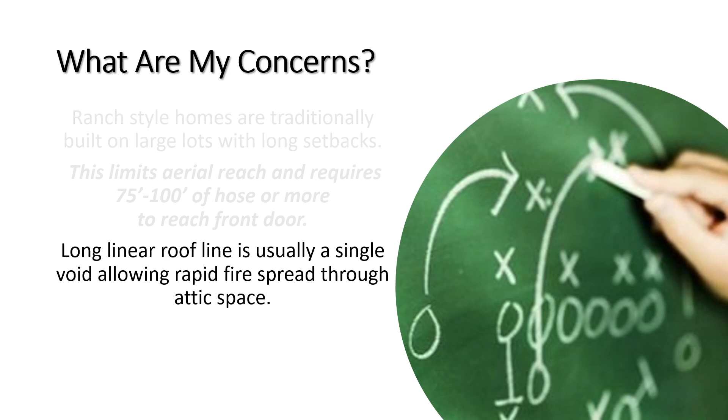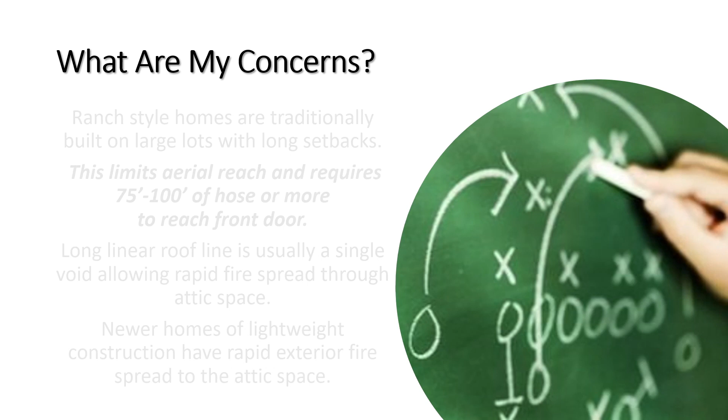Tactics. Where's the fire now? Where's the fire going? Can I get ahead of the fire? The tactics are similar to the small single-family dwelling. We use slightly larger fire flows based on the size of the structure. Depending on the age of the structure, they may have no exterior basement access, a partial basement access, maybe a walkout basement, or no basement at all. Maybe there's just a crawl space. Basement fires need to be addressed through the lowest entrance if at all possible.

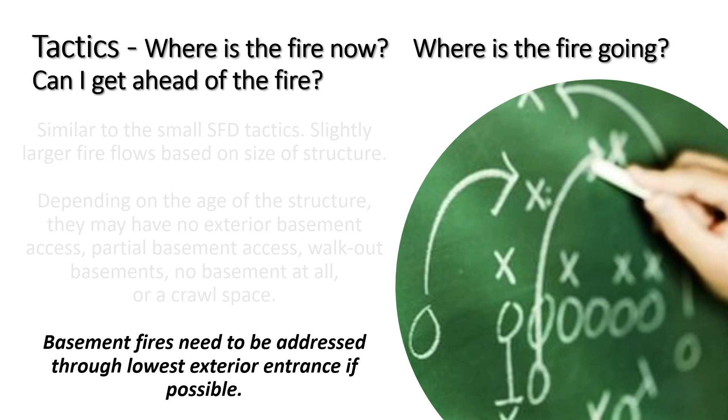The Colonial. The classic colonial style detached house floor plan has the kitchen and the family room on the first floor, and the bedrooms are usually on the second floor. As families create in-law suites, all manner of sleeping arrangements can be found in this home design.

Special attention should be given to alterations including additions, dormers, bump outs, and chimneys. Home designs may vary with additional structures, such as decks, patios, and enclosures being very popular and only limited by budget and permitting.

The initial on-scene report. Paramedic engine 740 is on the scene, on the Alpha side of 146 West High Street. It's a three-story colonial with nothing showing from sides Alpha and Delta. All units use caution. There is a swimming pool on side Charlie. I'll be doing my 360 and I'll provide an update.

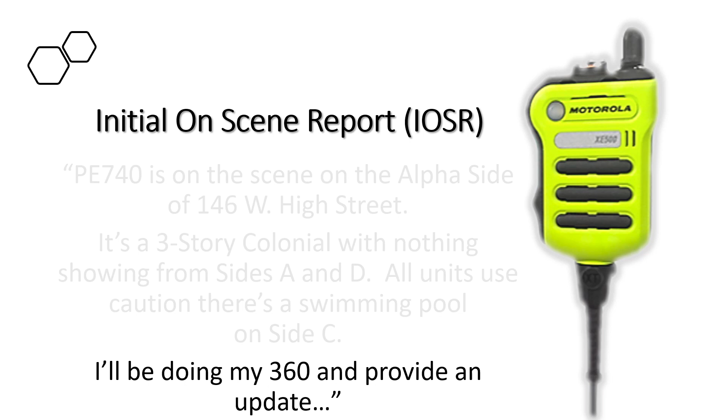What are my concerns? Traditional colonials have a large central chimney, or two large chimneys on opposite sides of the home. These are collapse hazards under fire conditions.

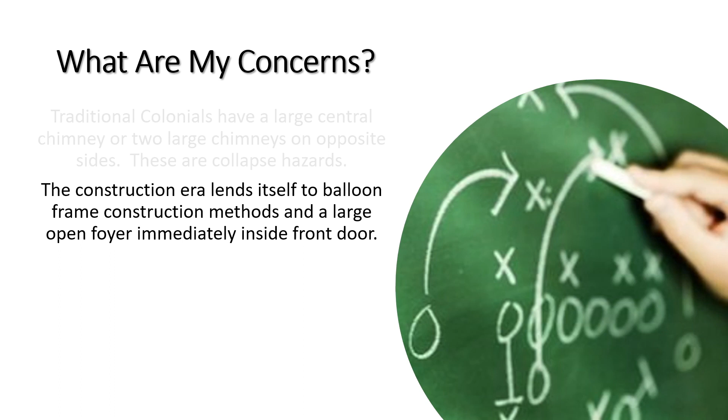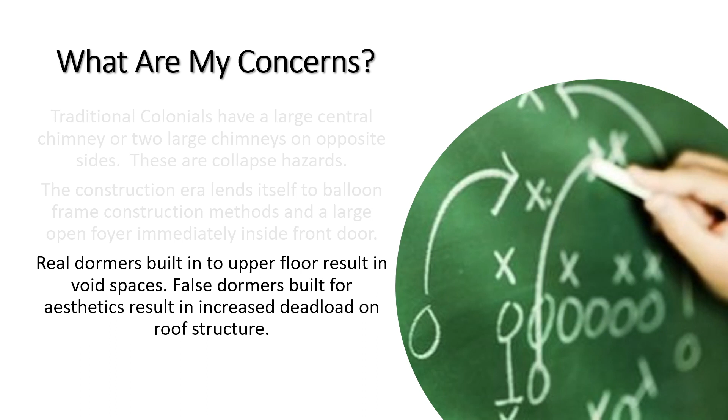The construction era lends itself to balloon frame construction methods and a large open foyer immediately inside the front door. Real dormers built into the upper floor result in void spaces, while false dormers built for aesthetics result in an increased dead load on the roof structure.

Colonials are often built on large plots of land, resulting in the same aerial access issues and hose line requirements of a rancher.

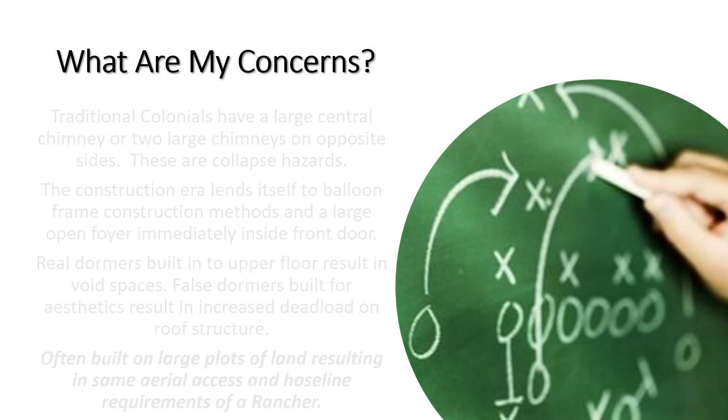Tactics. Where is the fire now? Where is the fire going? Can I get ahead of the fire? The large open foyer can result in rapid fire spread to the upper floor. Longer lines may be necessary to navigate the larger floor plan and a large front yard setback.

Balloon frame construction methods necessitate checking for vertical extension to multiple floors, the attic, and the basement. For fire in the walls, it might be quicker to pull the exterior siding than to pull heavy plaster and lath on multiple floors.

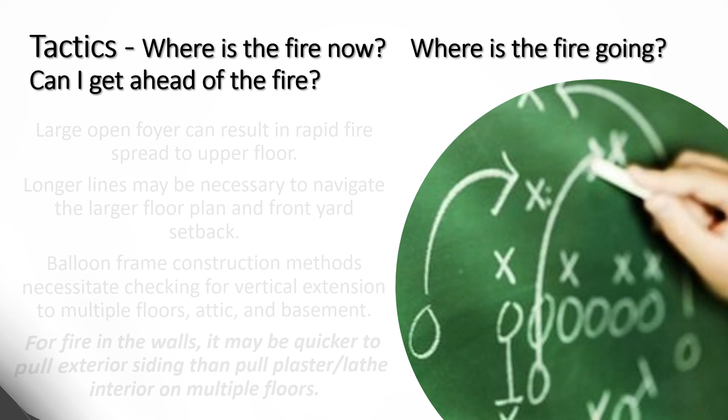The split foyer. These detached homes are a typical two-story with front entry between both floors. That means the giveaway for this design type is that inside the front door is a set of steps going up and another set going down.

Home designs may vary, with additional structures such as decks, patios, and enclosures being very popular and only limited by budget and permitting.

Do we count a foyer? The foyer level itself has no name, and it exists only as an entry to the stairs leading up and down into the home.

What's in a name? These homes may have 3 to 4 different levels and could possibly have sub-basements and garages. The naming of these levels follows common practices according to the IRP.

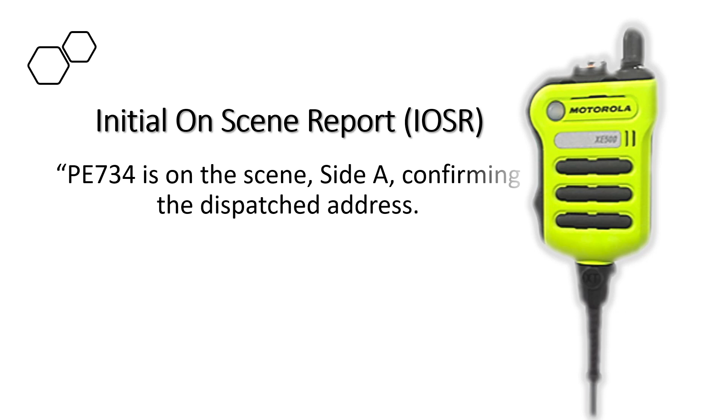Here's your initial on-scene report. Paramedic engine 734 is on the scene, side Alpha, confirming the dispatched address. It's a 2-story split foyer, single-family dwelling. I have nothing evident from Alpha, Bravo, and Delta. I'll be out investigating.

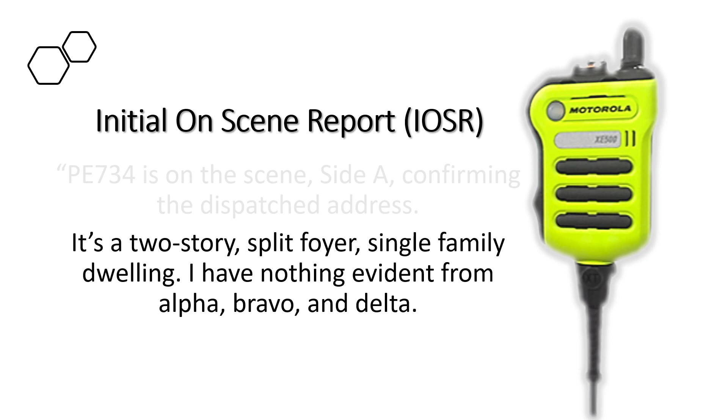What are my concerns? The floor configuration can lead to confusion in names and locations. The lower level is often mixed use and can include a den, a living space, bedroom, garage, a laundry area, and/or something unfinished. With these various uses come various fire loads.

The terrain and construction on the split foyer can make the windows of upper stories awkward for ladders.

Tactics. Where is the fire now? Where is the fire going? Can I get ahead of the fire? Remember to include floor names with the SUR or the IOSR.

It's a 2-story split foyer single-family dwelling. I'm going to call the floors the basement and the first floor, or the first and second floors. Place initial lines to protect the upstairs searches. Remember to always coordinate ventilation of lower levels to ensure flow paths are limited.

The split level. The front door is on the main level, which has the kitchen and family room. The bedrooms will be on the top level, but depending on the owner, the lower level may have some converted bedrooms also.

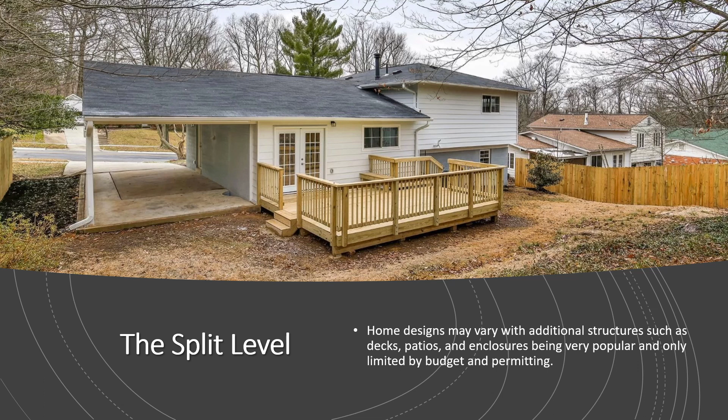What's the split? The entrance opens to Division 1. Once inside, a few steps up and down divide the upper and lower levels.

Initial on-scene report. Paramedic engine 702 is on the scene, side Alpha of a split level Type 5 single-family dwelling. I have nothing evident. I'll be out investigating.

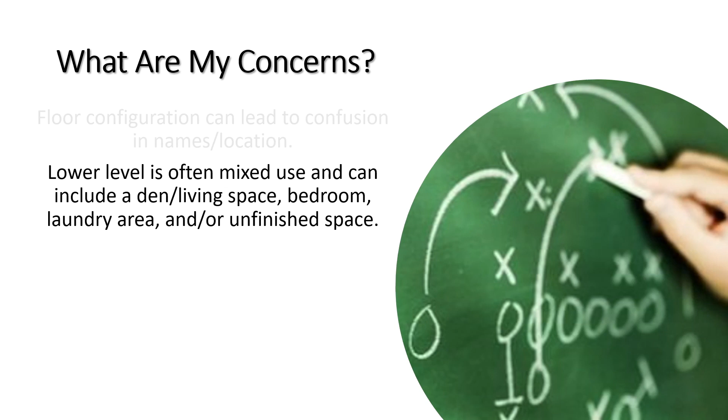What are my concerns? The floor configuration can lead to confusion in names and location of the split level home. The lower level is often mixed use and can include a den, a living space, a bedroom, a laundry area, and/or unfinished space. With these various uses come various fire loads. Remember, terrain and construction features can make the windows of the upper stories awkward for ladders.

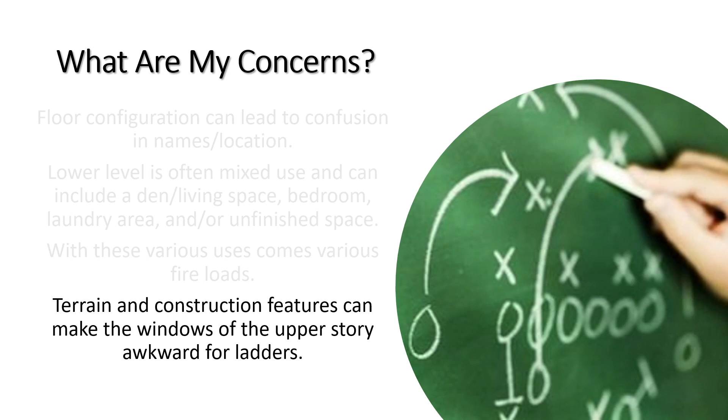Tactics. Where is the fire now? Where is the fire going? Can I get ahead of the fire? Remember to include floor names with your SUR or IOSR. For example, this is a split level Type 5 single family dwelling. I'm going to call the floors the basement and first floor, or first and second floors.

Place initial lines to protect the upstairs searches. And always remember, coordinate ventilation of lower levels to ensure flow paths are limited.

The Cape Cod. The Cape Cod style house is a low, broad, detached single-story frame building with a moderately steep pitched gabled roof, a large central chimney, and very little ornamentation. The first floor is much like a rancher, with the kitchen, a living room, and bedroom usually found.

If present, the second floor is typically divided into additional bedrooms. These homes are frequently desired as remodels into more modern designs or razed completely, giving way to the larger designs favored today and explained in some of the coming graphics.

Initial on-scene report. Paramedic engine 706 on the scene confirming 189 West Main Street. It's a 1.5-story Type 3 Cape Cod single family with nothing showing from sides Alpha and Delta. I'll be out checking and we'll get back to you with a SUR.

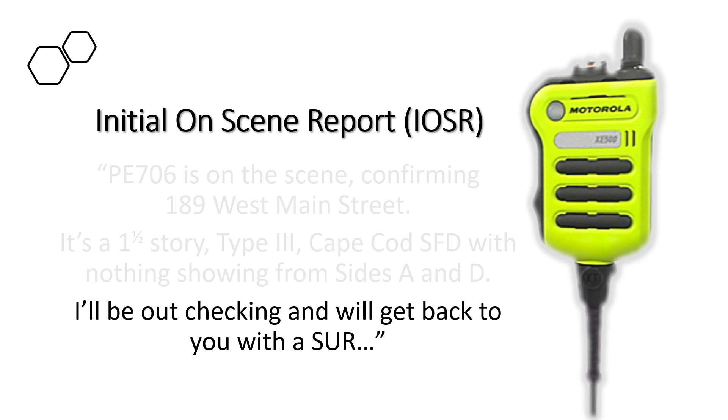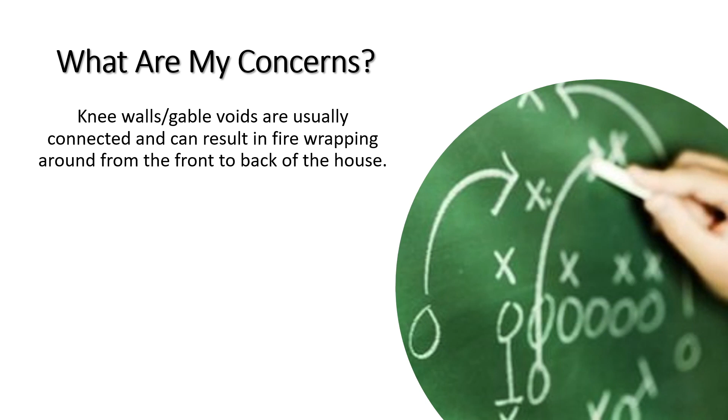What are my concerns? The knee walls and gable voids are usually connected if present in this cape, and they can result in fire wrapping around from the front to the back of the house. There's a significant amount of overhaul needed for older capes, with tongue and groove boards and plaster and lath wall coverings, and they may have those ornate metal or tin ceiling coverings.

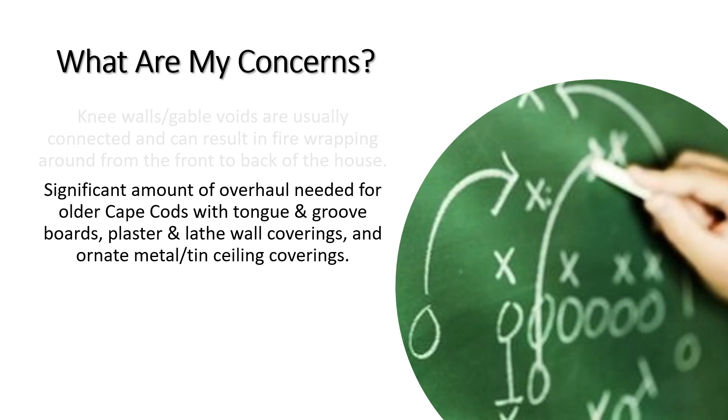Fires in the voids result in high heat and smoky fires, making locating the seat very difficult. The steep pitch and materials on the roof make roof work challenging and requires heavy amount of truck work.

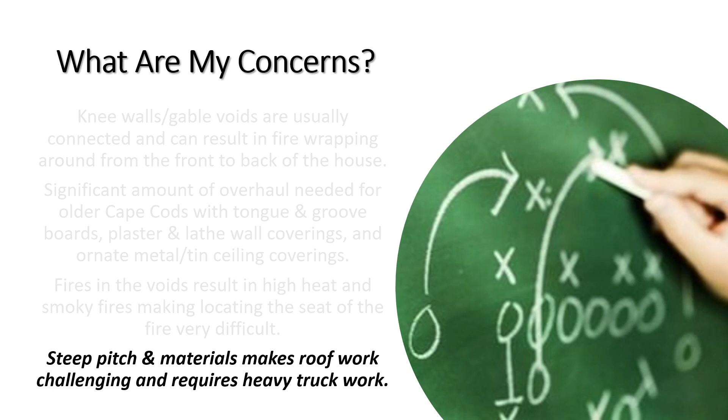Tactics. Where's the fire now? Where's the fire going? Can I get ahead of the fire? Ensure a line is in place before opening any walls or voids. Multiple lines may be necessary to handle fire running through the front and rear knee walls and overhead in the gable void.

Use power tools to help ease the workload on opening tongue and groove floors and plaster and lath walls. Positive pressure ventilation may be needed to clear smoke and cool crews operating upstairs, but ensure a line and a crew remains in place to handle any hidden fire.

The McMansion, or large single-family dwelling. The 3,000 to 5,000 square foot home built on very small lots.

This detached design is frequently placed in standing neighborhoods as a complete teardown of a previously built home. A giveaway is the odd look or size of the home in comparison to the rest of the homes in the neighborhood. This home is usually larger and taller with designs and structures occupying most of the available lot space. Vast open stairs and second-story ceilings are common in this design type.

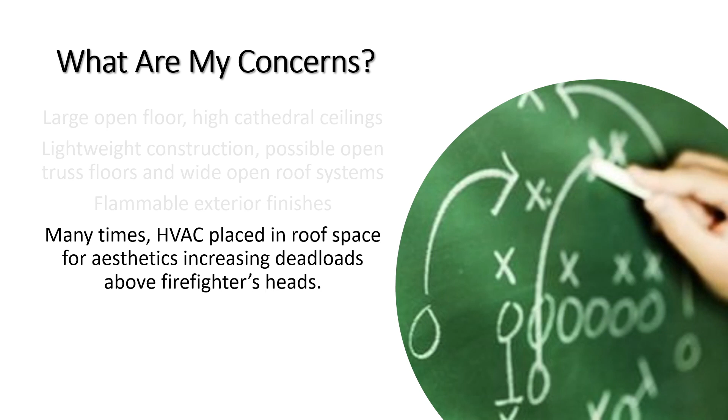As a matter of fact, aesthetics in general outrank function and safety in the design phase of these type of homes.

Tactics. Where's the fire now? Where's the fire going? Can I get ahead of the fire? Depending on the floor space, longer lines and larger diameter lines might be necessary for increased fire flow and further reach. Thermal imaging cameras are critical on structures with high ceilings to evaluate what is going on above the crews operating.

Many McMansions have multiple stairwells, and some have a catwalk through a grand foyer, easily causing disorientation or a fall risk. A line must be placed on an exterior fire to control fire and rapid extension.

The mansion: greater than 5,000 square foot homes on estate type properties.

Cost and imagination are the only limits in this home design. This leads to many owners creating completely unique homes, unlike any other in their community. These can be vast homes on estate-type lots, which create significant issues with water supply, requiring much coordination and possible tanker use.

The initial on-scene report: Paramedic Engine 710 is on the scene, side Alpha, the dispatched address. This is a very large two-story single family, approximately 150 by 75. Units use caution, there's a covered pool on side Charlie. Nothing evident from sides Alpha, Bravo, and Charlie. I'll be out investigating.

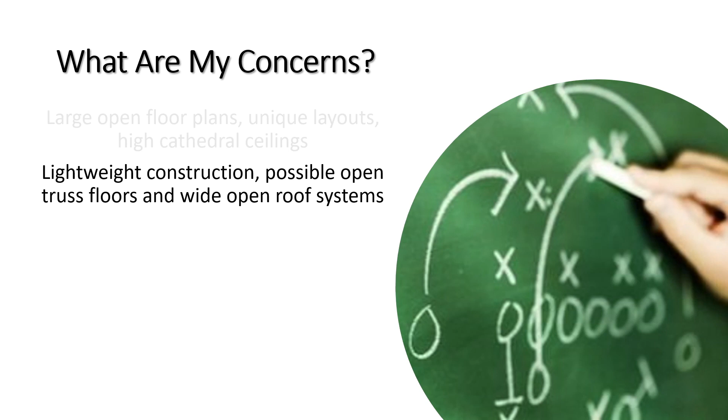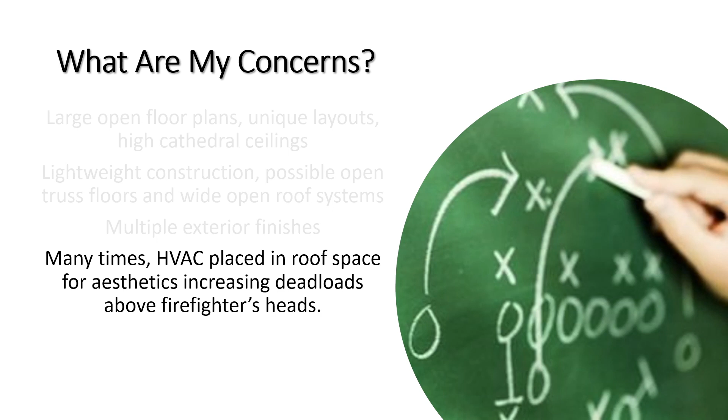What are my concerns? Large open floor plans and unique layouts, high cathedral ceilings, lightweight construction techniques, possible open truss floors, and a wide open roof system above it all. There are multiple exterior finishes very common in this design. Many times the HVAC is placed in the roof space for aesthetics, increasing the dead load above firefighters' heads. Aesthetics in general outrank function and safety in the design phase of these very large homes.

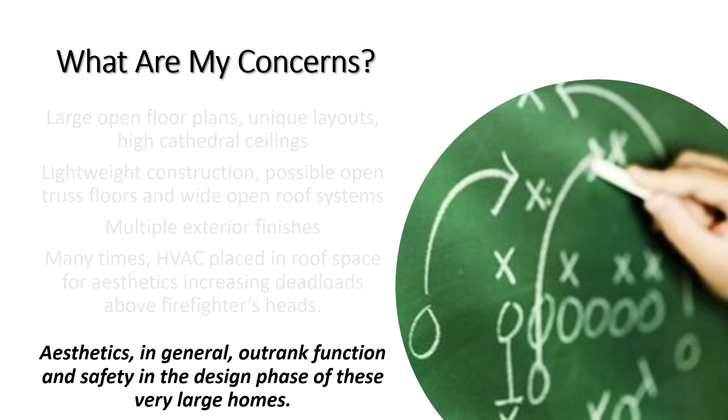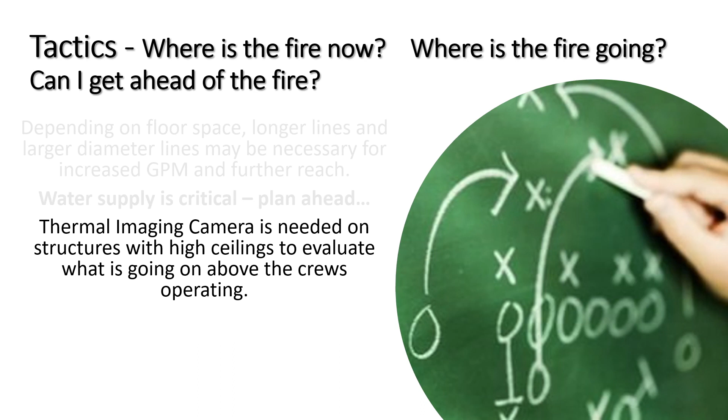Tactics: where is the fire now? Where is the fire going? And can I get ahead of the fire? Depending on floor space, longer lines and larger diameter lines might be necessary for increased fire flow and further reach. Water supply is critical, so plan ahead. The thermal imaging camera is needed on structures with high ceilings to evaluate what is going on above the crews operating below. A line must be placed on the exterior fire to control fire and rapid extension. Special services should consider the use of a tagline for search orientation.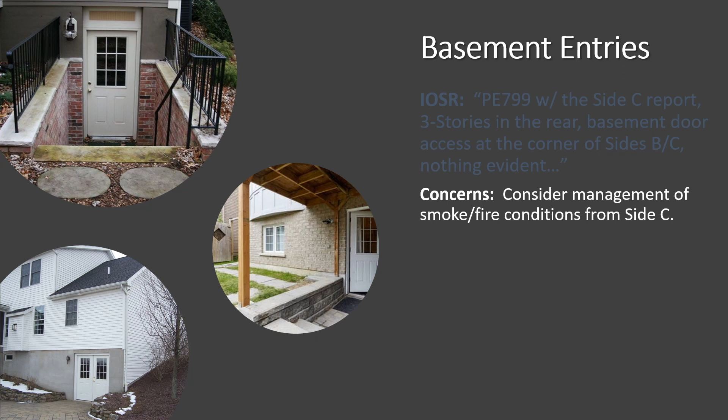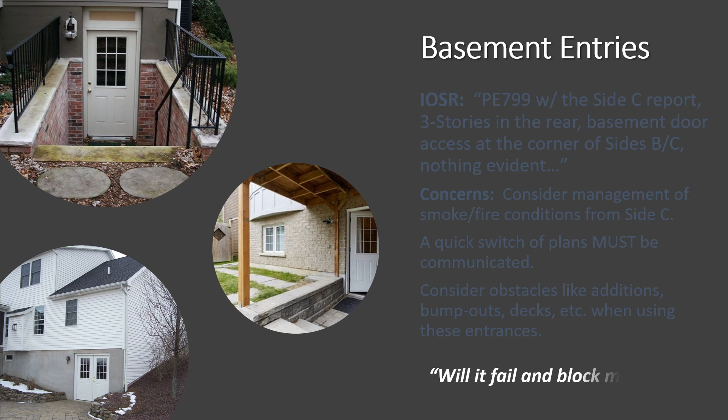Basement entries. Paramedic Engine 799 with the side Charlie, 3 stories in the rear, basement door access at the corner of Bravo and Charlie. Nothing evident. What are my concerns? Consider management of smoke and fire conditions from the Charlie side. A quick switch of plans must be communicated. Consider obstacles like additions, bump outs, and overhead decks, etc.

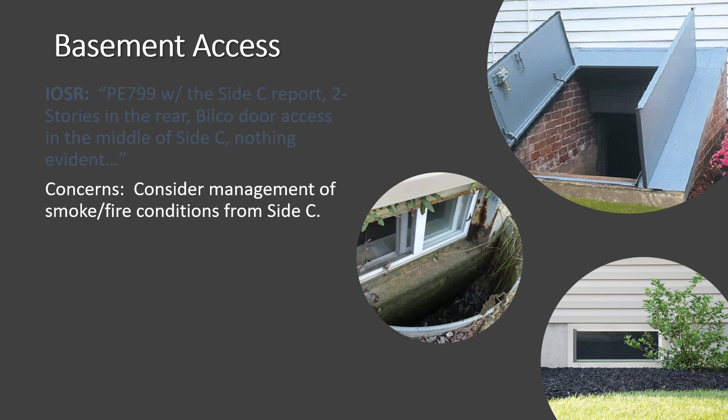Basement access can be different than an entry. Paramedic Engine 799 with the side Charlie, 2 stories in the rear. I have Bilco door access in the middle of side Charlie with nothing evident. What are my concerns? Consider management of smoke or fire conditions from the Charlie side if you're able. A quick switch of plans must be communicated. Except for the Bilco, these are access only and not meant for fire rescue entry. Bilco doors must be positively secured before entry. Remember, these lock.

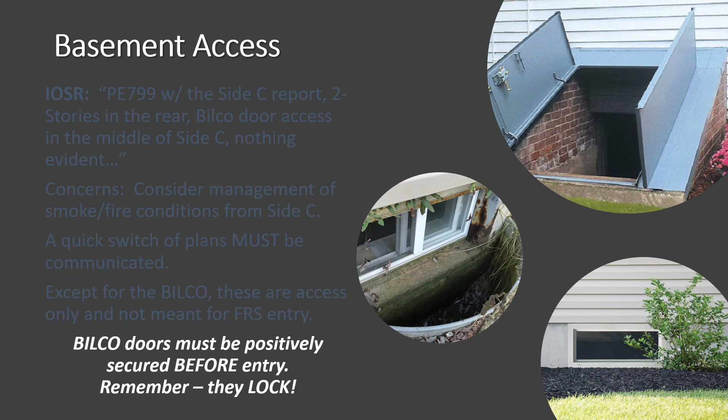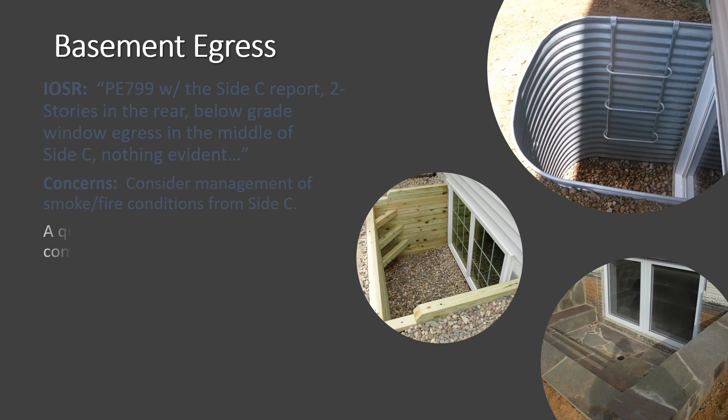Basement egress. Paramedic Engine 799 with the side Charlie, 2 stories in the rear, below grade window egress in the middle of side Charlie with nothing evident. What are my concerns? Consider management of smoke and fire conditions from the Charlie side. A quick switch of plans must be communicated. They're only intended for emergency egress and not two-way entry and egress. The below grade egress usually indicates a sleeping area.

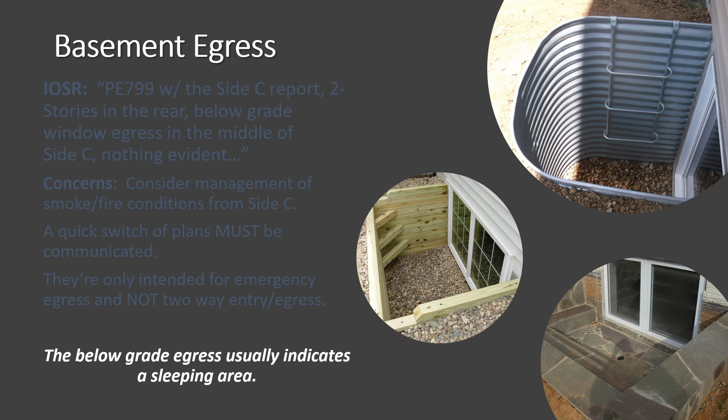The single family attached. This is an attached structure with its own address intended for one family. These dwelling units share party walls and have small lots in the front and back of the home. Commonly, these are referred to as the duplex, the townhouse, the hybrid townhouse, and the row house.

The duplex. A duplex is a single home that is divided into two equal, separate living spaces. Most common is a house with two doors, side by side, that enter into different living spaces in one building. There is frequently a small yard in the front and back of this type of attached house.

This attached home will have a firewall or a party wall of at least 2 inches of sheetrock separating each unit. Think of a 2-unit townhouse, a left and a right side, with separate utilities. The floor plan is mirrored on each side. What does this mean? This means that the interior is exactly opposite the other, as if looking in a mirror.

The initial on-scene report. Paramedic engine 705 on the scene of side alpha of the dispatched address. It's a 2-story brick type 3 duplex. I have nothing evident from side alpha. I'll be out investigating.

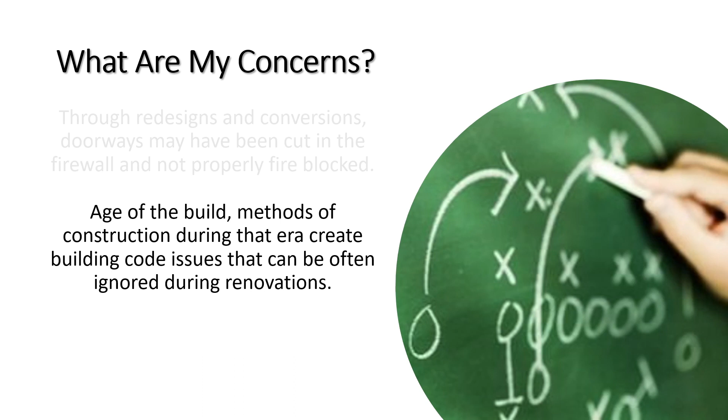What are my concerns? Through redesigns and conversions, doorways may have been cut in the firewall and not properly fire blocked. The age of the build, methods of construction during that era create building code issues that can often be ignored or overlooked during renovations. Depending on the area, consider multiple unconventional apartments. There's a hint. Are there interior keyed doors?

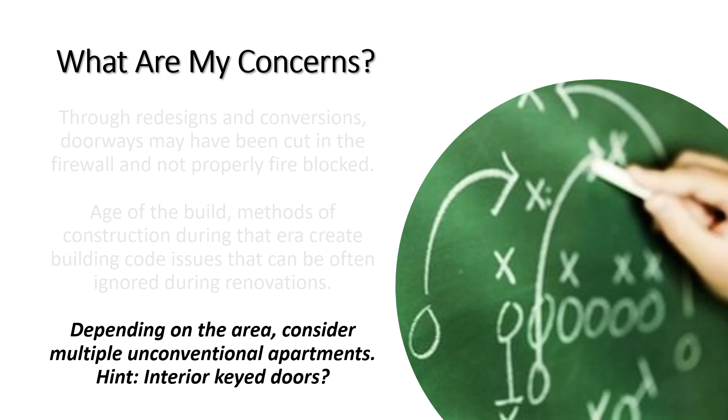Tactics. Where's the fire now? Where's the fire going? Can I get ahead of the fire? Getting a line on the fire and managing the exposure is critical. The duplex has a common roof and firewall system, and crews must confirm the firewall is intact and there is no presence of smoke or fire in the exposure. The thermal imaging camera is a great tool to evaluate what is going on above the crews operating and in the exposure building. Coordinate ventilation to ensure flow paths are limited.

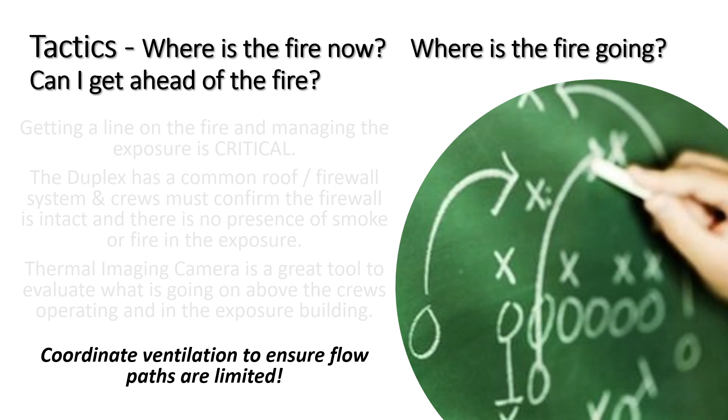The townhouse. The townhouse is defined as a single family attached with at least 2 floors that share a wall with another house. Unlike a duplex or a fourplex, however, each townhouse is individually owned and of 2 basic types: end of the row or middle of the row.

The end of the row townhouse. Exposures on the end of the row are just a few feet away. Fire spread is a real concern and even hastened by the slightest wind. Windows on the side Bravo or Delta pose problems for control of fire spread. Many have the grand peaks and dormers which hide large void spaces. Additions, decorative railings, bump outs, decks, etc. must be considered for potential failure, like this side Charlie image.

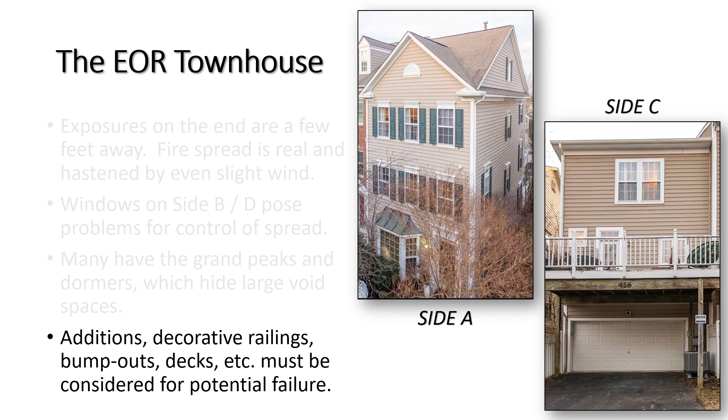The open stairs. Running bottom to top, these open staircases are a quick way for smoke and fire to travel throughout the townhouse. Consider this a chimney, enhancing the flow path.

The initial on-scene report. Paramedic engine 723 is on the scene of side Alpha, confirming the dispatched address. It's a 3-story lightweight construction, middle of the row. I have nothing evident from side Alpha. I'll be out investigating.

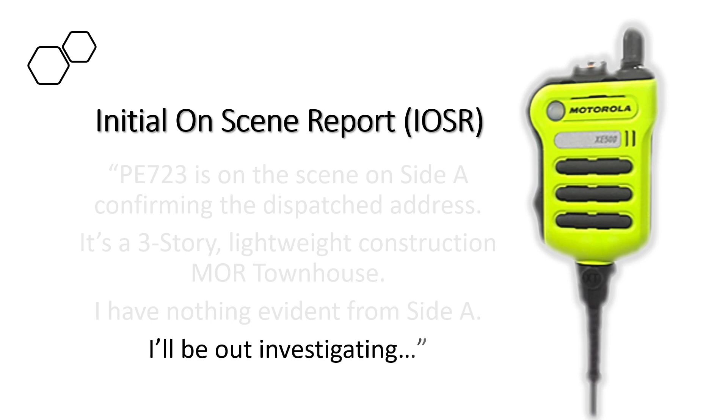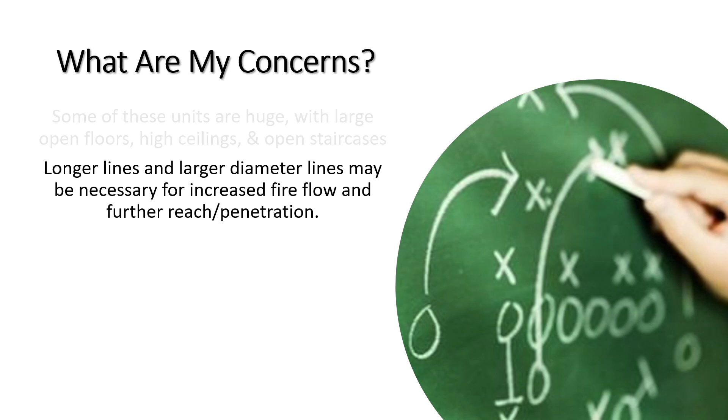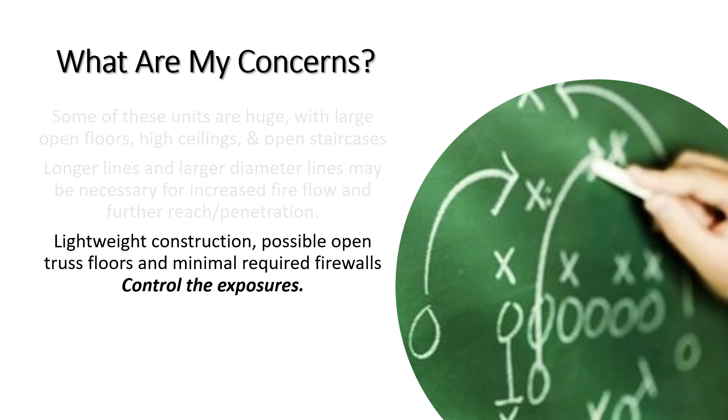What are my concerns? Some of these units are really huge, with large open floors, high ceilings, and open staircases that run top to bottom. Depending on the size and position in the row, longer lines and larger diameter lines might be necessary for increased fire flow and further reach in penetration. Remember, these are lightweight construction and have possible open truss floors with minimal required firewalls. This means we must control the exposures.

Some have flammable exterior finishes. Exterior finishes and facades do become unstable in fire conditions. Ask yourself, am I too close? Remember, facades equal collapse.

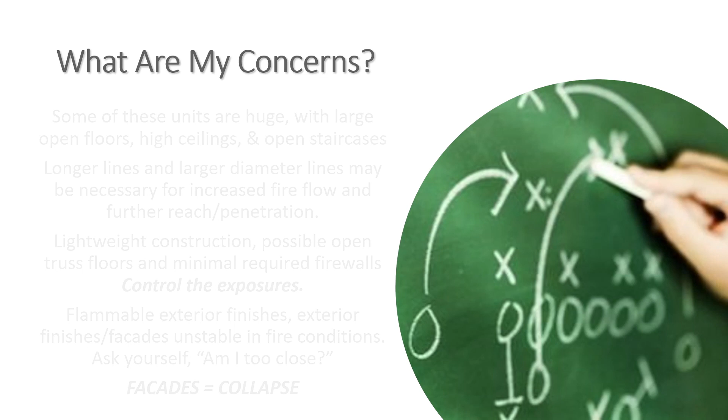Tactics. Where is the fire now? Where is the fire going? Can I get ahead of the fire? Getting a line on the fire and managing the exposure is critical. The townhouse, like the duplex, has a common roof and firewall system, and crews must confirm the firewall is intact and that there is no presence of smoke or fire in the exposures. The thermal imaging camera is a great tool to evaluate what is going on above the crews operating and in the exposure buildings. Coordinate ventilation to ensure the flow paths are limited.

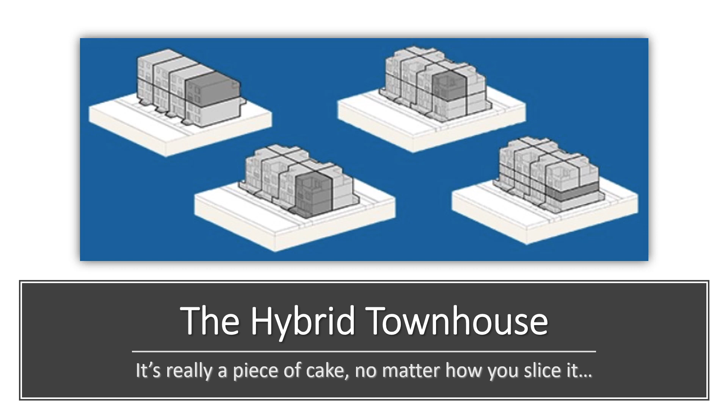Hybrid townhouses look and feel more like condo living. Many have HOAs that take care of common concerns like snow removal, grass cutting, and play areas. Providing lots of daylight, these hybrid townhouses have plenty of storage space, and some have private garage parking.

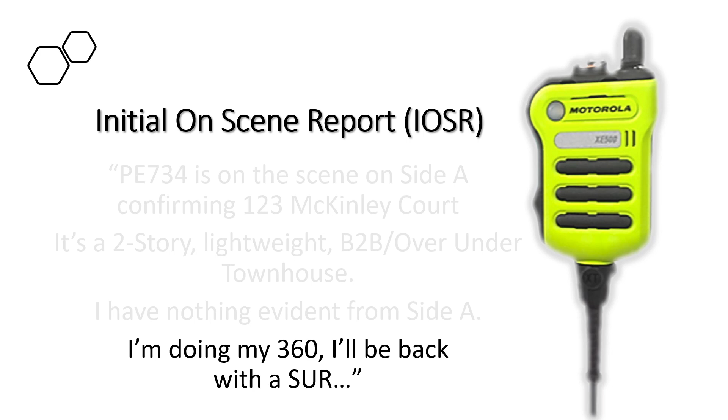What are my concerns? Some of these units are broken up in weird ways, having entrances that don't match with expected levels. Depending on the size and position in the row, longer lines and larger diameter lines might be necessary for increased fire flow and further reach or penetration.

Lightweight construction, possible open truss floors, and minimal required firewalls means we must control the exposures. Flammable exterior finishes and proximity to other units require early management of these exterior exposures.

Tactics. Where's the fire now? Where's the fire going? And can I get ahead of the fire? Getting a line on the fire and managing the exposure is critical. The hybrid townhouse has a common roof and firewall system. Crews must confirm the firewall's intact and there's no presence of smoke or fire in any of the exposures, back to back, top to bottom.

The thermal imaging camera is a great tool to evaluate what is going on above the crews operating and in the exposure buildings. Coordinate ventilation to ensure flow paths are limited.

The row house. Row houses are of similar construction and consist of several adjacent, uniform units, originally found in older, pre-automobile urban areas, such as Baltimore. In many cases, off-street parking is accessed by a common alley on the Charlie side. A row house will generally be smaller and less luxurious than a modern townhouse dwelling.

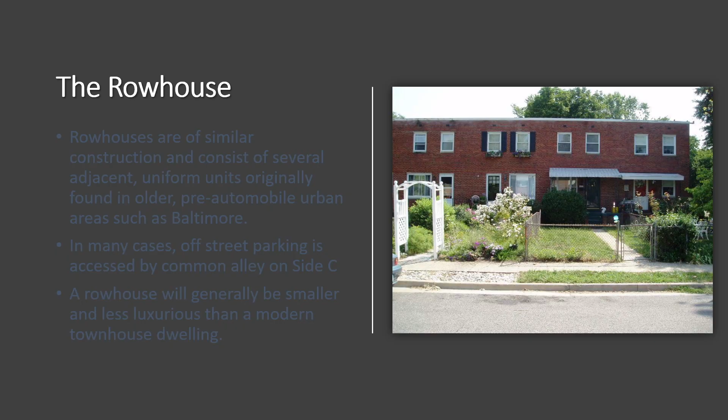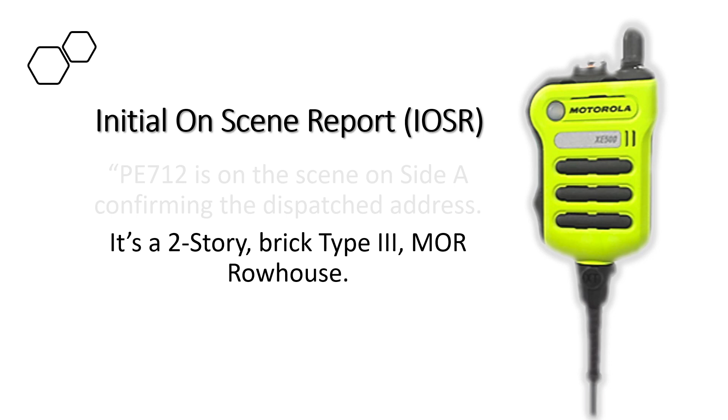The initial on-scene report. Paramedic Engine 712's on the scene side Alpha confirming the dispatched address. It's a two-story brick Type 3 middle of the row house. I have nothing evident from side Alpha. I'll be out investigating.

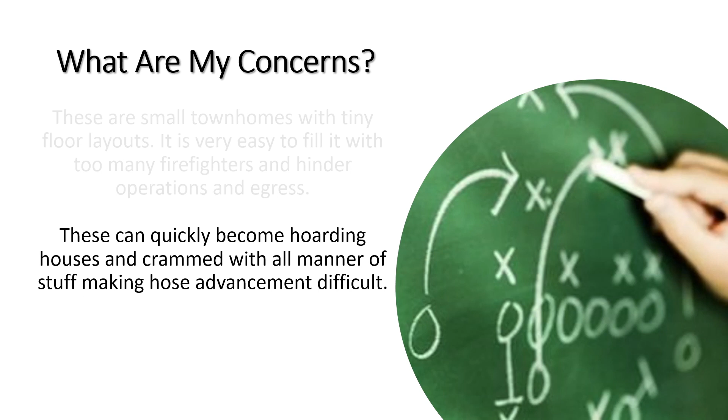What are my concerns? These are small townhomes with tiny floor layouts. It's very easy to fill it with too many firefighters and hinder operations and egress. These can quickly become hoarding houses, and crammed with all manner of stuff, this makes hose advancement extremely difficult. Ask yourself, are the firewalls intact? Will smoke and fire run the roof or cockloft?

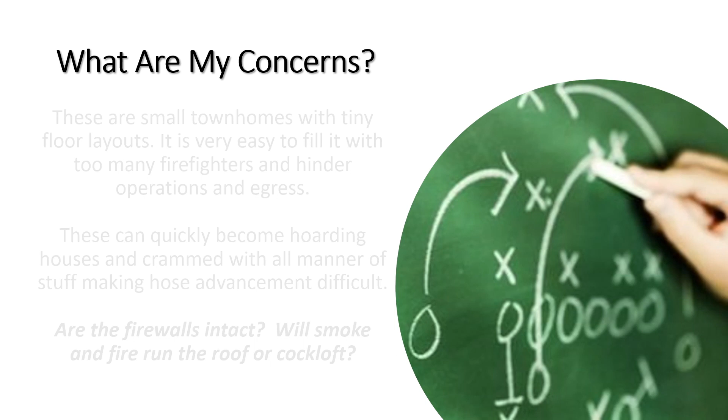Tactics. Where's the fire now? Where's the fire going? And can I get ahead of the fire? Getting a line on the fire and managing the exposures are critical. The row house has a common roof and a firewall system, so that means crews must confirm that firewall is intact and there is no presence of smoke or fire in any of the exposures.

The thermal imaging camera is a great tool to evaluate what is going on above the crews operating and in the exposure buildings. Coordinate ventilation to ensure flow paths are limited.

A few final thoughts. In this presentation, we have described different types of single-family residential structures commonly found in Montgomery County, Maryland. You are now able to quickly identify the type of occupancy as part of your IOSR, and we've heard a few examples of each.

Common established tactics for fires occurring in these structures were presented and reinforced per the MCFRS IRP. Areas within each structure most prone to smoke and fire spread have been identified and concerns for management have been discussed.